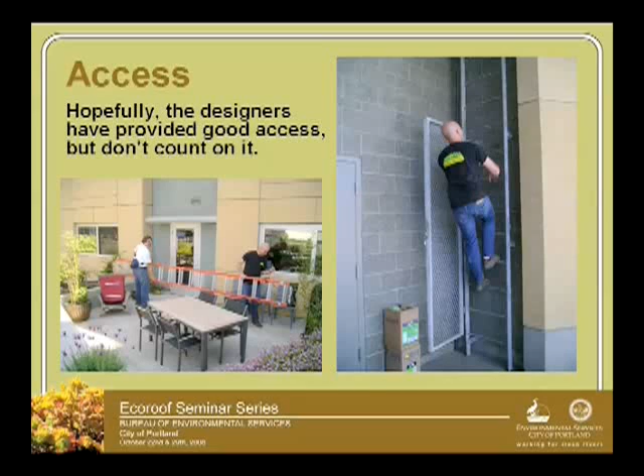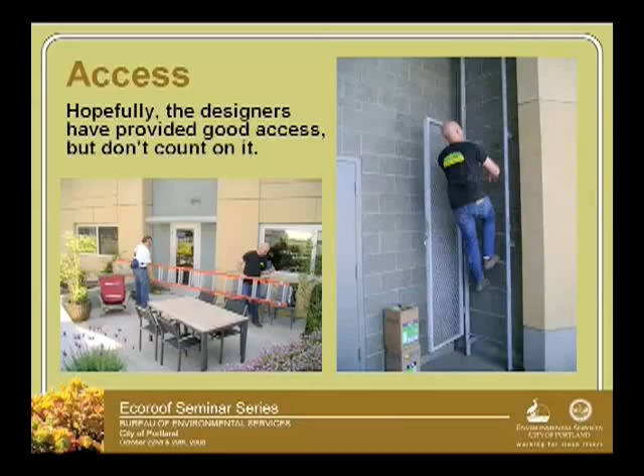Oh, right, access. So a lot of these buildings, especially the larger ones, access for the maintenance person. This is where the maintenance person has to climb to get up and down from this roof. So you can imagine, and what he decided was to leave all of the weeds and the soil and everything up on the roof, and he actually created a compost pile on the roof because it didn't make sense to either throw it off the side of the building because it's in such an urbanized area, or to try and get it down this ladder.

This one doesn't have a ladder at all. You can see Dave's working away here. So he actually has to bring a ladder in, and I don't know where they keep it, but they have to use this ladder to get up to the roof every time they want access. And this ladder, I mean, we had extended pretty much the entire length of that thing, and it was rickety and scary when we went up that thing. It was a big bending ladder that went all the way up.

And the other thing I wanted to point out, too, I think just from the residential side of things, is Tom and I have often thought about putting Ecoroofs on our individual houses, and I know I've got a fairly steep pitch on my roof. And I was thinking that, boy, if I was going to design it, I'd want to design it in a way that was as low maintenance as possible, because I know that I don't want to be getting up there often with a step ladder, or my wife doesn't want me getting up there often with a step ladder and pulling weeds and those kinds of things.

Or if I have a very, very fussy design and then I look up there and, oh my God, there's something that's encroaching upon the lines that I created or whatever it might be. You want something that you could look up there and tolerate a little bit of difference and variety as it comes along, and then maybe go up there every once in a while, like Tom's talking about, and pick a few of those tree weeds and a couple of other maybe more robust weeds, and then just leave it alone.

So I think, consider also who's the homeowner or the resident that's going to be living there, are they going to be interested in taking care of it? And then also, is there a possibility of just creating an external stairway on the outside of the house that might allow you to just walk right up to the edge of that rooftop and then get on? I don't think that would be prohibitively expensive, and I think it might be a good way to go. So anyway.

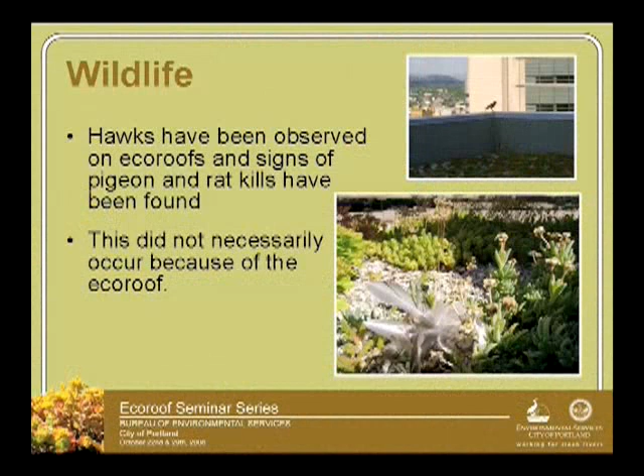these are other items. So I already talked about the rat that I didn't get to put in the presentation. A lot of this, it's nice to attribute good things and say, oh, we hope this is happening because it's an Ecoroof, but rats and crows and pigeons are pretty standard wildlife for our urban environment. So these kinds of things are happening on rooftops to a certain extent. We don't know.

Now, one thing that was sort of an obvious good thing, I think anyway, is that Dave and I and a couple of our colleagues, when we went to the O&M building and were standing there looking at the plants, about 50 feet away from where we were standing, a killdeer flew in and landed on the Ecoroof and started making kind of squawking and making noise.

Well, that's pretty nice that a killdeer found the roof, and whether it was just finding it on that occasion or maybe it actually had a nest there earlier in the season, we don't know. We didn't find signs of the nest or anything, which would be gone now because it's fall. But that was kind of neat. So.

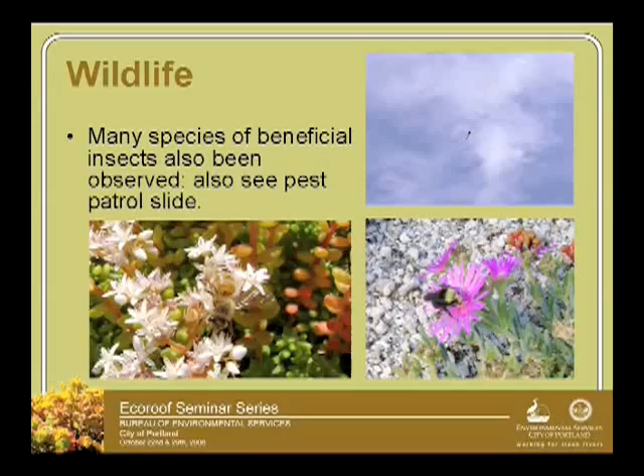I mean, they were landing, and I'm sure they were eating. It was like going to Trader Joe's. They don't just go to the wetland. They go to other places to find food, I assume. We haven't, but there's been a lot of discussion about bats, and I'm not sure.

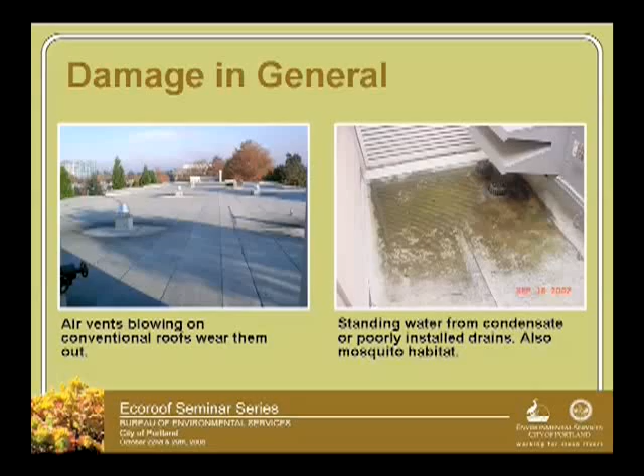Anyway, and then damage. This is another item. So the air constantly blowing on conventional roofs. This roof right here, I was up here the other day, and it's starting to really get a lot of ripples in it. It was installed in 2000, so it's only 8 years old. This is the part of the Buckman building that does not have an Ecoroof. And then, of course, air conditioning condensate or drains that are not draining very well because they're not installed exactly perfectly. And as we talked about, mosquitoes.

And this happens summer and winter. So summertime, it's actually 68 degrees or whatever we are inside is blowing out, as well as in the midst of wintertime. So those are important things to look at. And this is where we have, in most cases, trouble with these plants. And this is where we also have a lot of aphids.

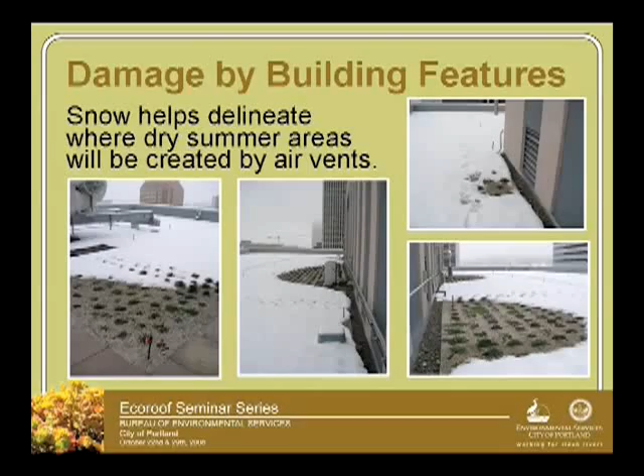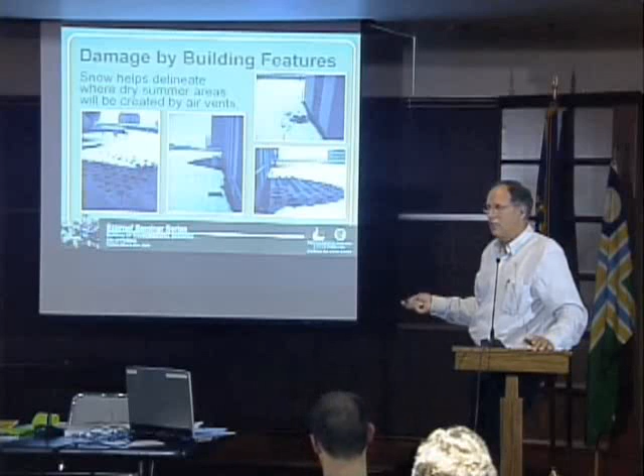So we've got this artificial environment or microclimate that facilitates, in some cases, these pests that we're finding on the plants. So if we were to say, okay, get up there and spray with pesticide all the time, that seems like we need to figure out what can we do in these locations to get plants, and this is where the ice plant comes in, because the ice plant seems to be doing best in these locations because maybe it can take the wind more than some of the other species.

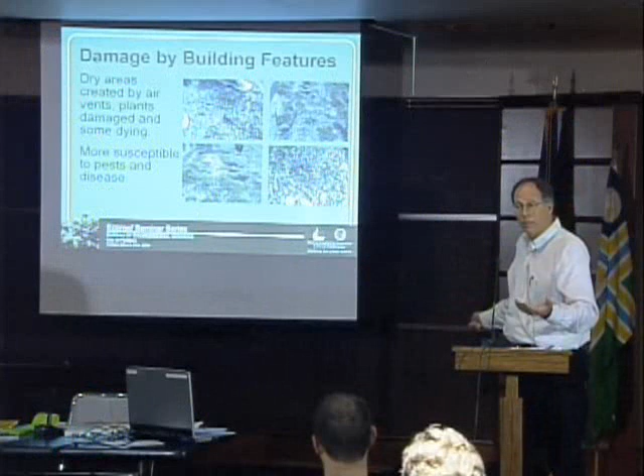And this is the, again, dry areas, but the plants damaged and some dying. Well, I already just said it about the susceptibility of, for instance, the different temperatures and what facilitates pests that might be in those areas. You can see here where this plant, you can't see it very well, but it's an ice plant that grew a lot in the wintertime because it's in a vent area, but then in the summer, we weren't able to water it enough to keep it alive, so it was dying back.

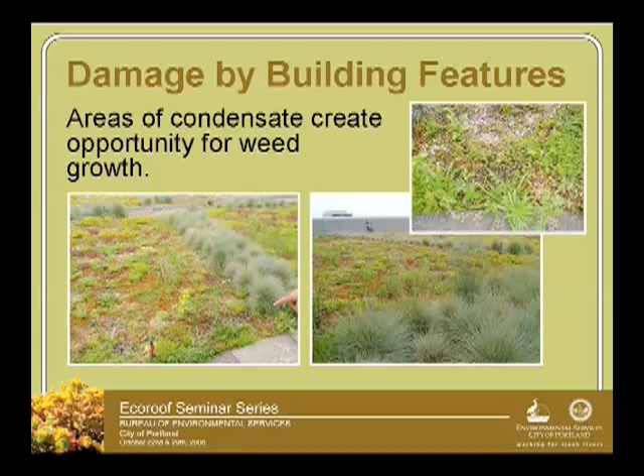And then this is the condensate. So we have a number of locations where we have air conditioning condensate, which then creates a lot of moisture in the soil, and we get a lot of moss and things. So we've got all these different conditions on this roof, and potentially a lot of projects, especially existing buildings, would have these same types of problems.

Too much water here in the summer because of this or that, and these dry air vent areas, and then other things like this. So you don't know what the maintenance people are doing.

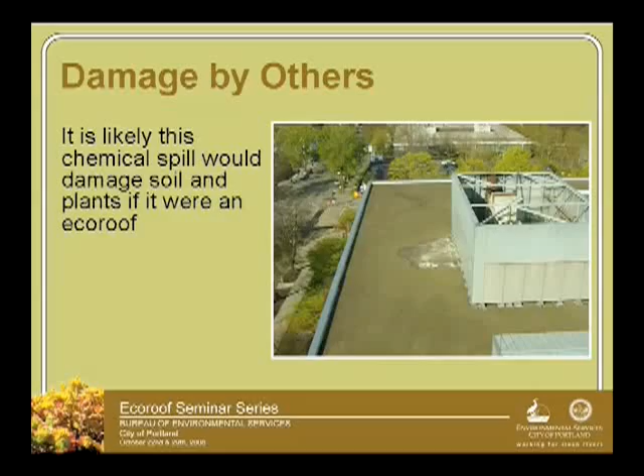You might remember this shot from last week where we were talking about pollutants associated with runoff. If this was an Ecoroof surrounding this facility, this mechanical equipment, whatever all this junk was, that's quite a large area of fluid, whatever it was that came out. That could be very detrimental, or maybe not, to the plants that might be up there if it was an Ecoroof. So there's just a lot going on with these different mechanical things.

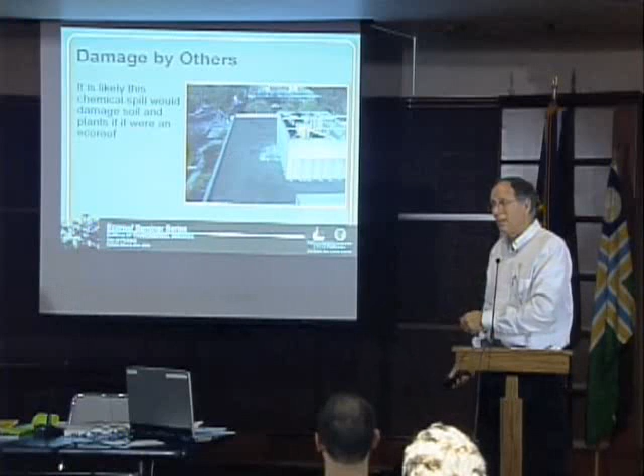And roofs in the past, hopefully we're going into a new era, roofs in the past were just, you didn't have to worry about much because it's just an old roof and you don't have to worry about this kind of stuff. And, of course, a lot of people don't think about what goes down the drain, but we're into water quality and what goes into the river and things like that. So this kind of thing can still be going on. To what extent, we have no idea in the city.

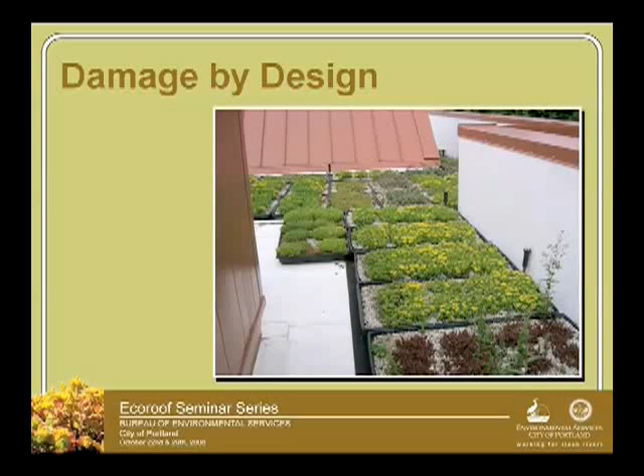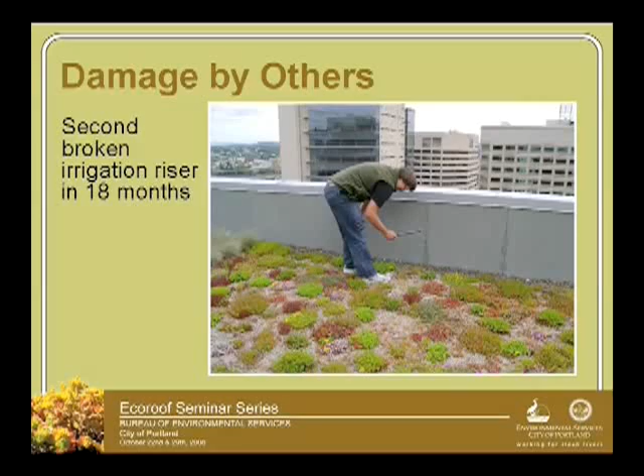No, so somebody had been up there and somebody stepped on it and Dave found it. Well, and the best part was that it had been placed neatly back into its sleeve, except it was kind of listing to the right. Right. So don't think it would have worked terribly well after that. And there are a lot of people on rooftops that you don't even know. There's lots of trades up there. That's another potential problem when you get into the pros and cons of irrigation.

And one last thing about irrigation is that any irrigation system, it's a system, and it's a mechanically constructed type thing, and it is prone to malfunction with time. So whether people kick it and break it off and things like that. Is anybody from the irrigation industry here? Okay, so think about how do you start designing for this kind of environment, and some products are already there, but there's a lot to learn.

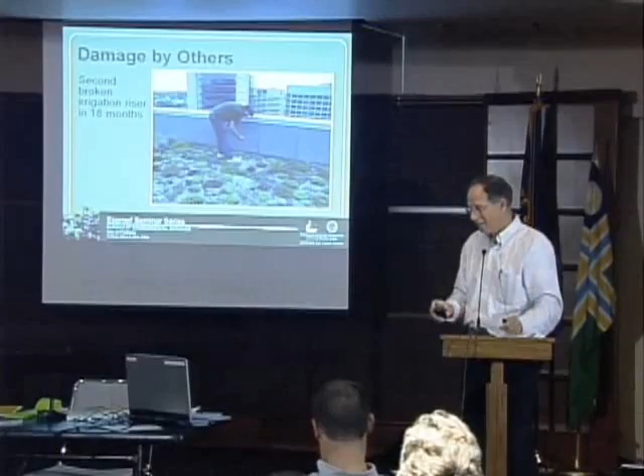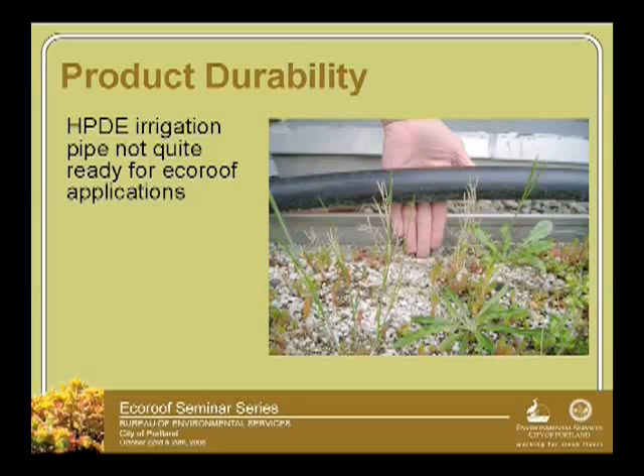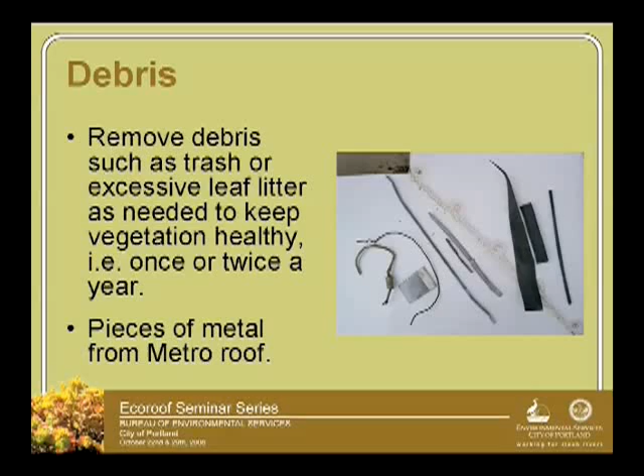And then I guess it's not the last comment about irrigation. So this type of pipe, and we already talked about that. And this is just an idea of when these other trades are up on the roof. This is what they leave. Yeah, this is what can be left behind. So when we were working with Metro, this was all found within a 2,500 square foot area, and these are all remains of pieces of things from some kind of trade that was working up on the roof that just left this stuff behind, and it's just laying there on the membrane. Well, I gathered it from the membrane.

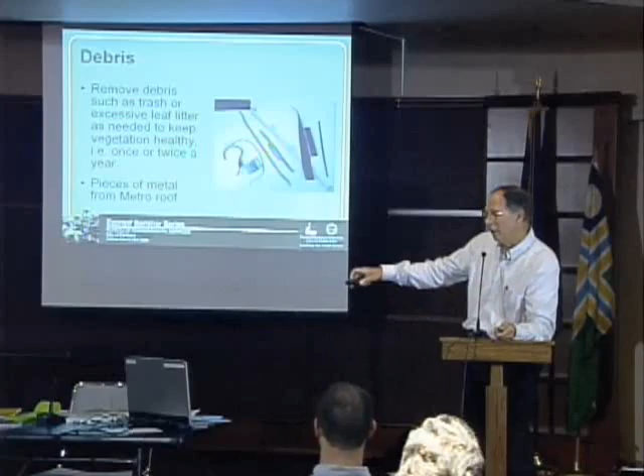And so hopefully people are checking their drains now without an Ecoroof, but you should check your drains at least once a year. And if you're up there checking the drains in terms of your O&M plan, then tell them to check everything else. Check the plants, check the irrigation, that kind of thing. So at least inspect it once a year and make corrections.

And if there's erosion, sometimes from something very simple like the air vents blowing in a certain area, you just put a thin layer of gravel on it. Now, if you have a very tight tolerance with regard to weight, you'd want to use something like pumice, like red cinder, a very lightweight material. You've probably lost some soil anyway from the plants dying and then the soil blowing off.

And so another issue is what happens on the roof with regard to these other trades, and sometimes they can put things up on your Ecoroof that are not part of your plan, and I'll show you a picture of that.